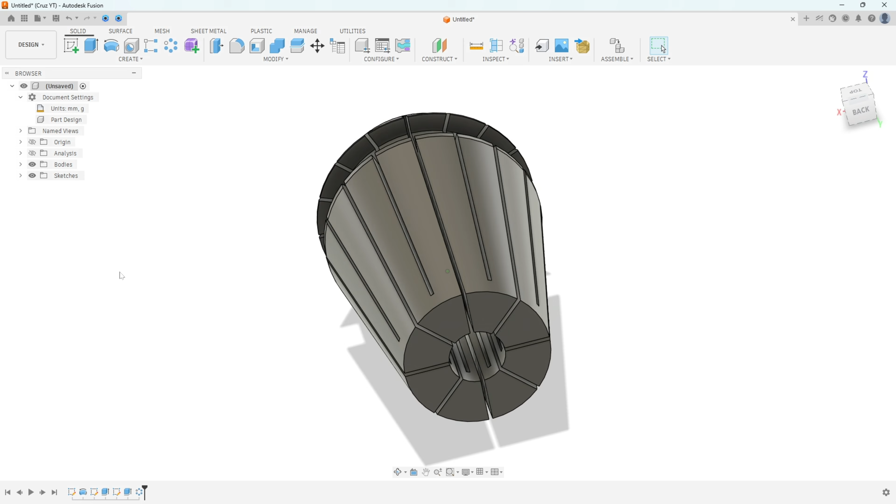Let's create one more tutorial in Autodesk Fusion. In this tutorial, you'll learn to create this collet chuck. And to create this, we'll learn to use Revolve, Thin Extrude, and Circular Pattern. So open Fusion and let's go.

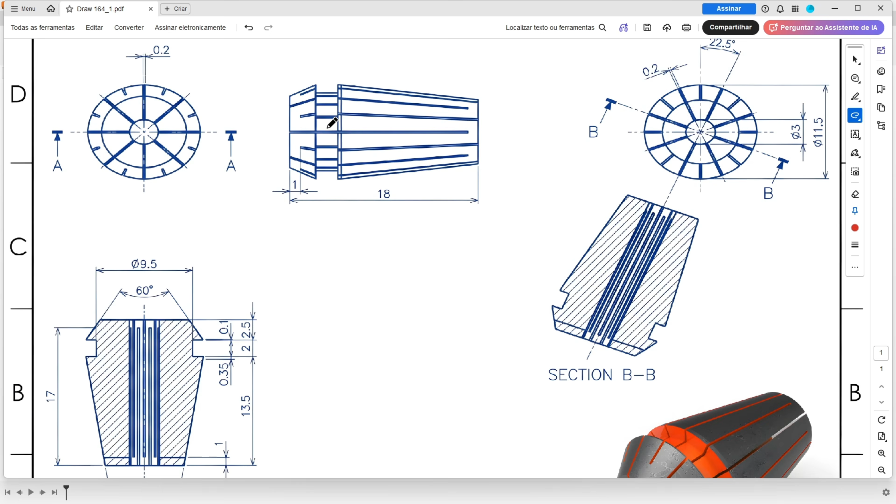The first step to create this collet chuck, we will select the right plane and make this sketch. We have the dimensions here. And here will be the midpoint. And the first thing that we'll make, we will create a center line with 18 millimeters of length. And we will create a line for this hole here.

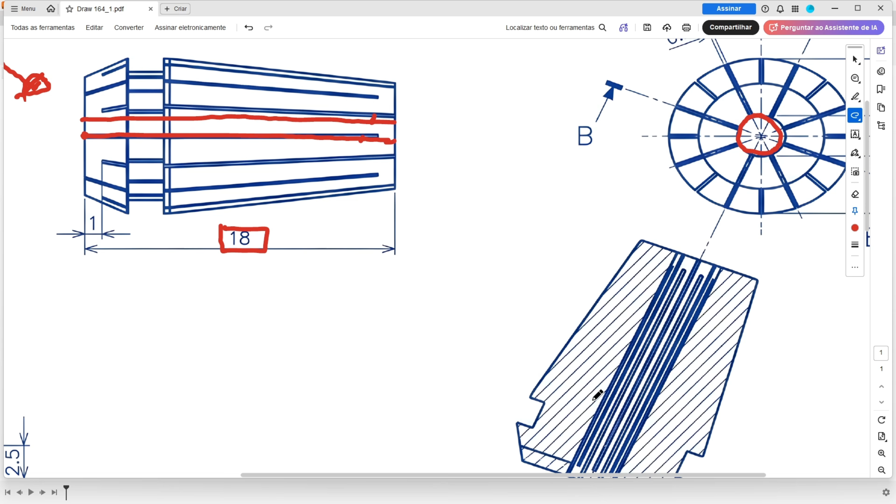So we will create a line here because we use the Revolve to create this part, okay? And the distance between this line here and this one will be the radius of this hole. And the radius is 3/2, 1.5 millimeters.

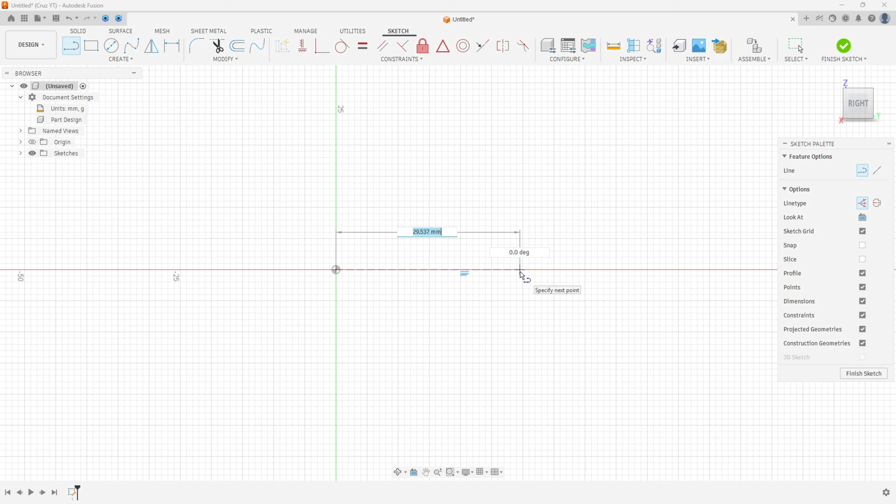So let's create this. Open Fusion, go to create a sketch, select the right plane, select a line, construction geometry, make a line here with 18 millimeters of length. And select line again, but remove the construction geometry, make a line here, and go to constraint, select equal, select this line and this one, and go to sketch dimension.

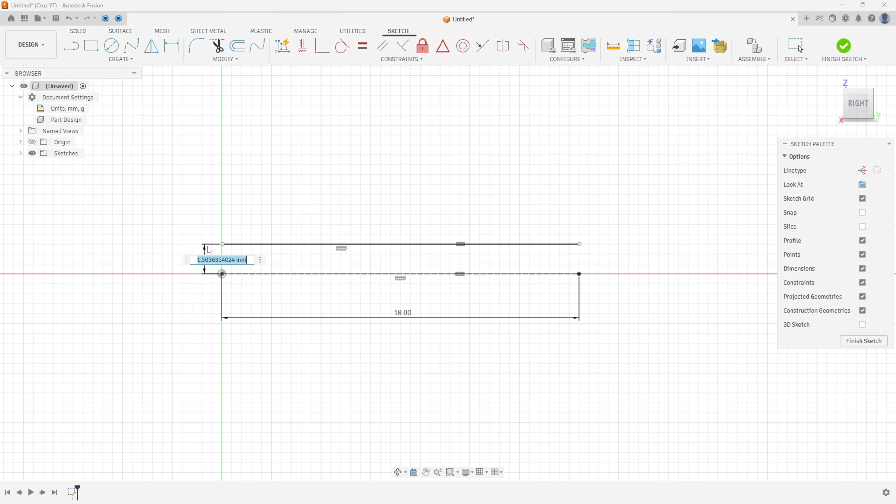The distance between these two lines is 1.5 millimeters. And here go to constraints, horizontal/vertical, select this point and the midpoint. We made this one here. And now we will go to this sketch here.

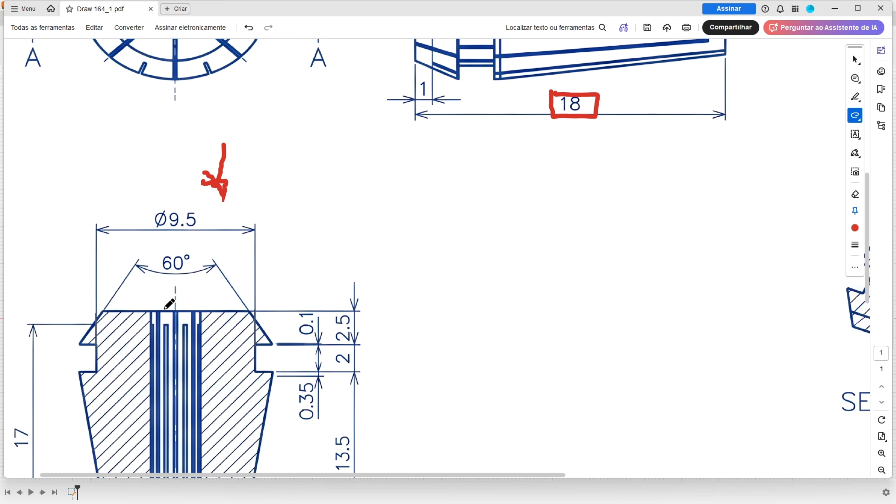And the first thing that we'll make here, we will create this line here, and look that we have a dimension here for a vertical line, and we will create a line here. This line here has 0.1 millimeters of length. The distance between this point here and this one will be 2.5 millimeters.

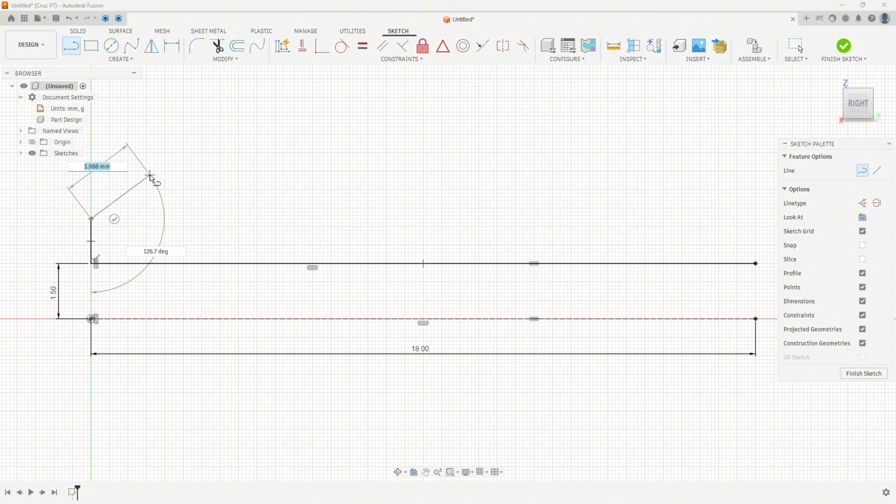So let's create this. Go to line, click here on this point, make a line here, another line here, and another one here. And go to sketch dimension. The distance between this point here and this line is 2.5 millimeters. And this line here has 0.1 millimeters.

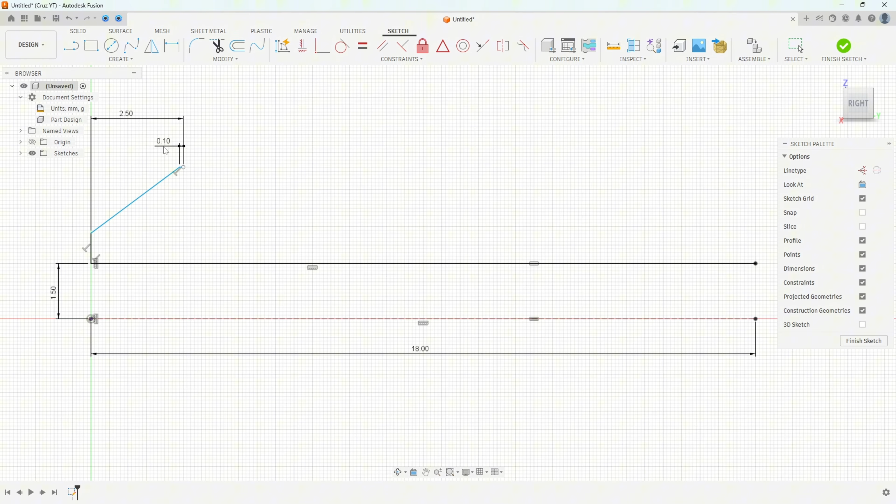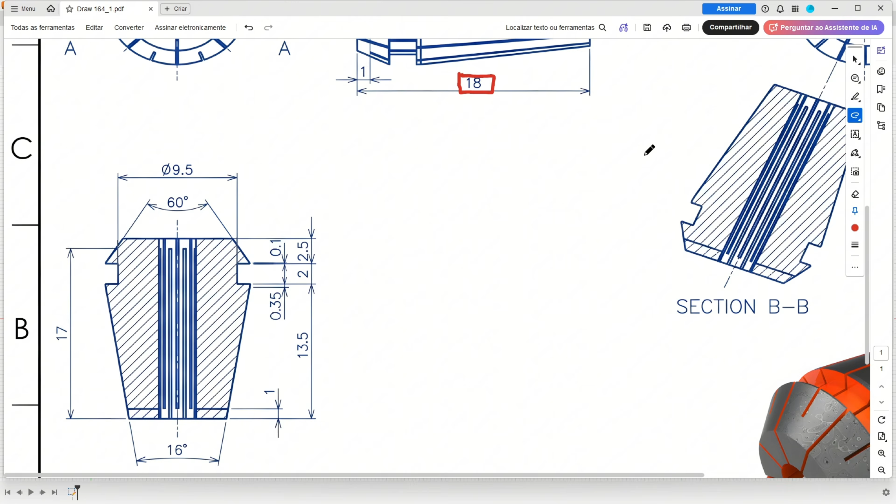And the angle between this line here and the center line is 60/2. It is 30 degrees. And the distance between this line here and the center line is the diameter of this chuck. The diameter 11.5/2 will be the radius here, okay? 11.5/2. So select this point and the center line here, 11.5/2, and press OK. Let me move the dimensions here a little bit.

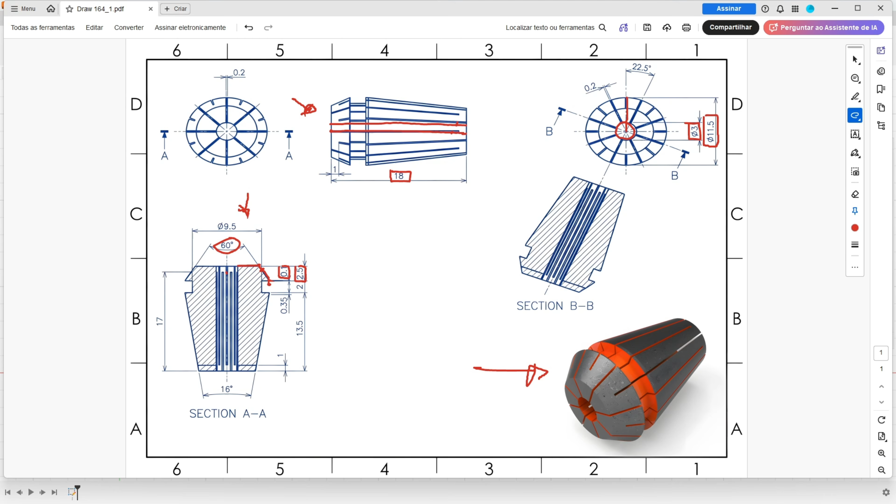We made this one. And now we will create these three lines here. And the length of this line is 2 millimeters. And the distance between this line here and the center line is 9.5/2. And this point here and this point have horizontal/vertical constraints.

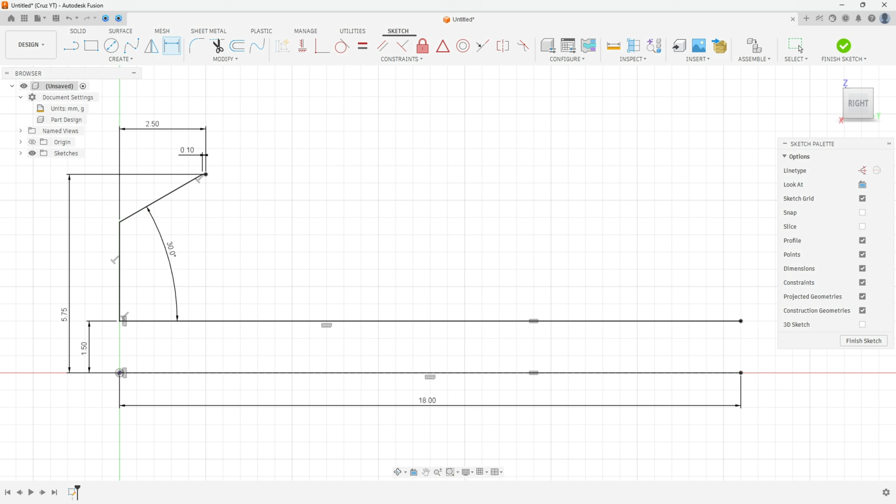So select line again, click here on this point, make this sketch here. Go to constraint, select horizontal/vertical, select this point, and go to sketch dimension. We have 2 millimeters here. And the distance between this line here and the center line is 9.5/2.

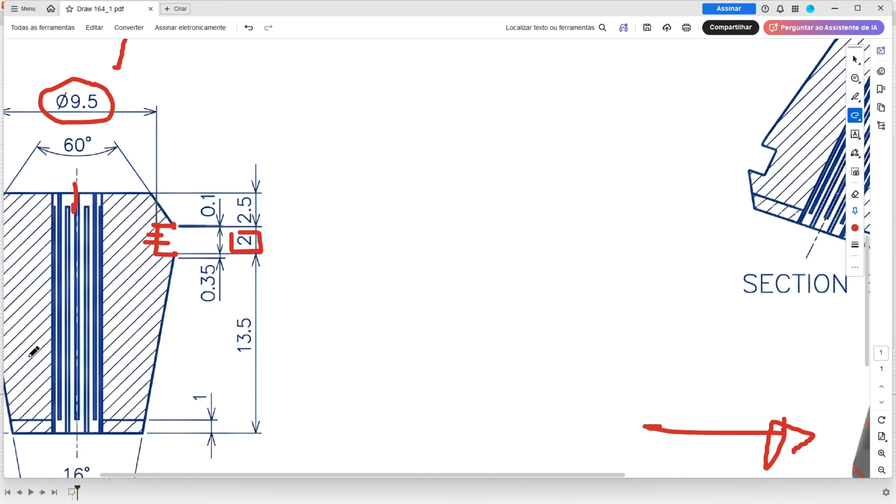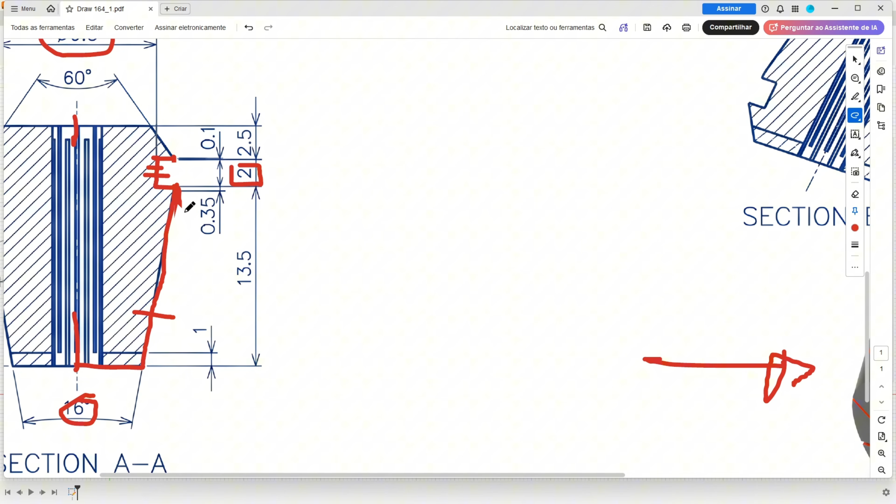And now we will create these two lines here. And here, the angle between this line and the center line is 8 degrees, 16/2. Select the line, click here on this point. But let me see something here. We have a vertical line here. So we have a line here with 0.35 and then these two lines, okay?

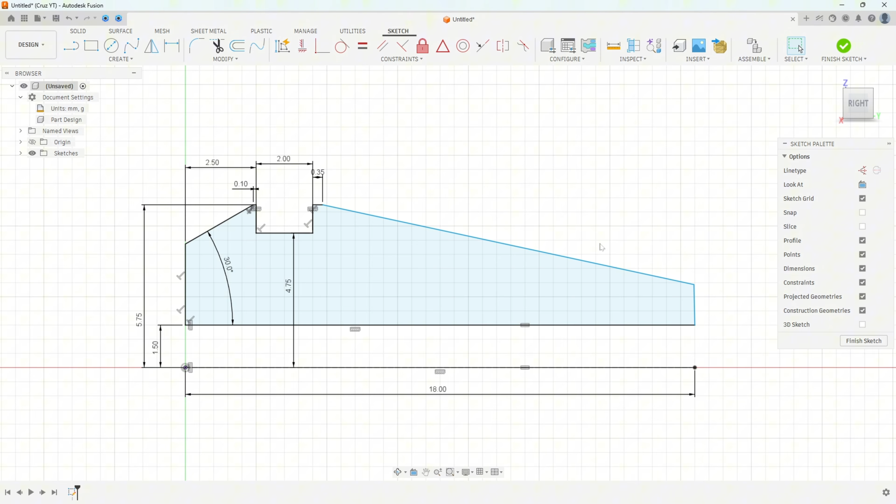So make a horizontal line here with 0.35 and now create these two lines here. Make sure that this line is a vertical line and the angle here is 8 degrees.

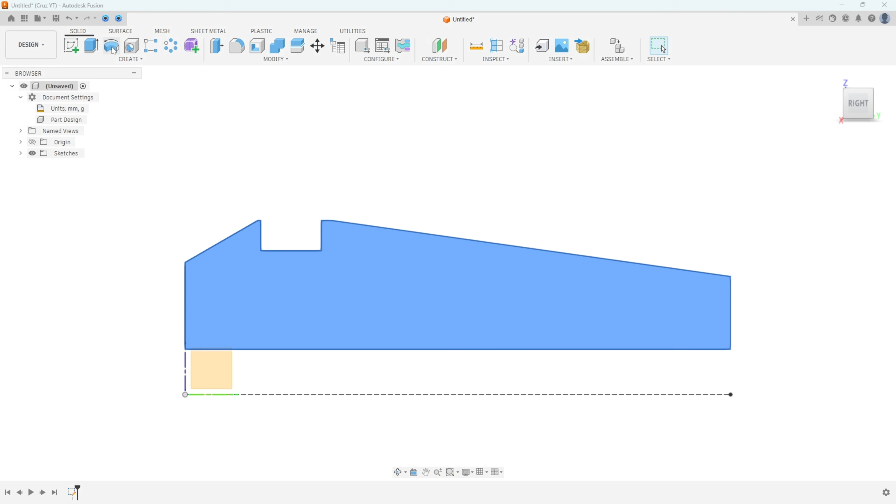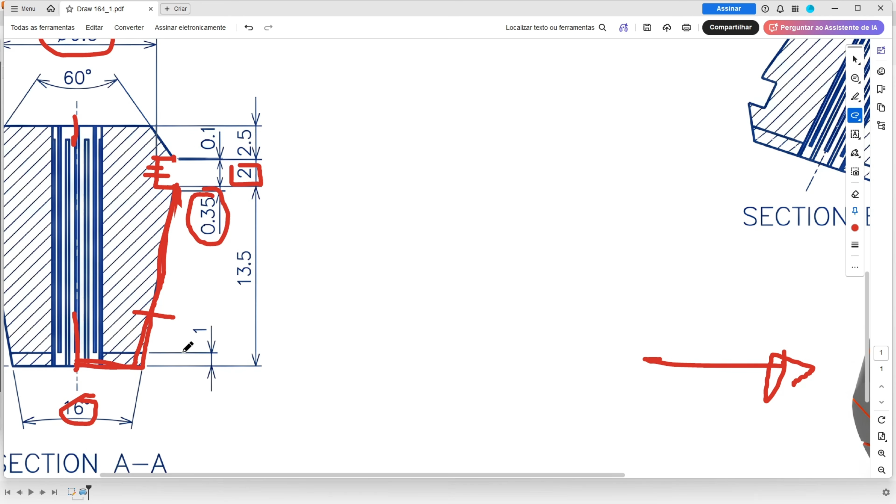We made this sketch and now finish the sketch and go to Revolve features. The axis, select this construction line. Operation here is new body and the angle 360 degrees and press OK. We made this one. Okay. And now we will create this cut here and this face.

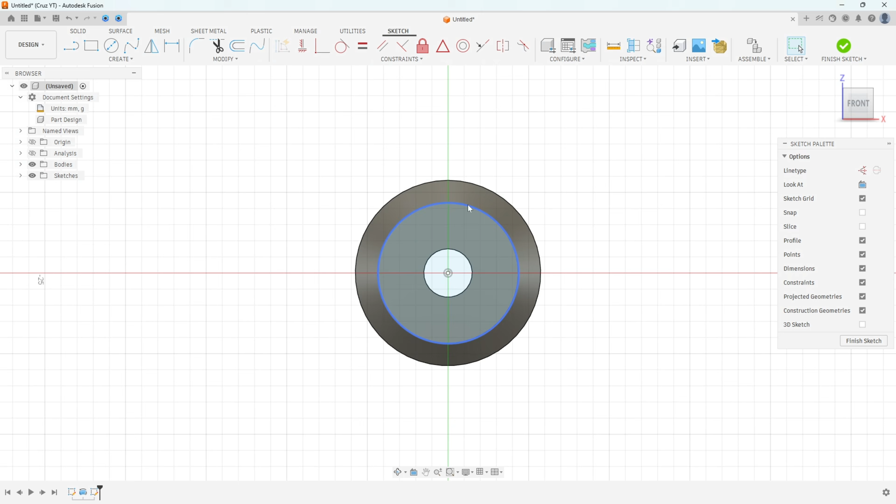So to create this cut, we will select this face here to create a sketch and we'll make a line here. Look that the angle between this line and this center line is 22.5 degrees. So let's create this. Go to create a sketch, select this face, select a line. Let's create a center line here with 10 millimeters.

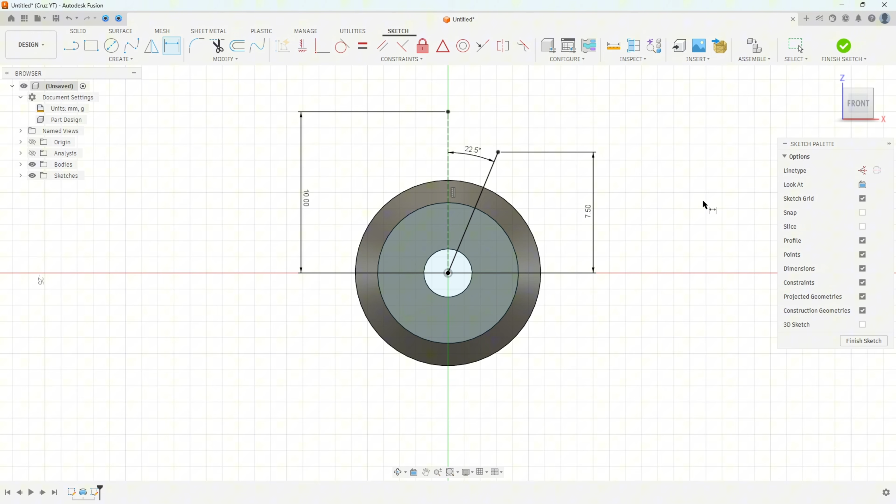And create another line here, but remove the construction geometry. And go to sketch dimension. The angle here is 22.5 degrees. And the distance between this point and the midpoint, let's use 7.5 millimeters. And now finish the sketch.

We need to cut this and the thickness of this cut is 0.2 millimeters. And we need to cut this 17 millimeters. We will create a cut on this side with 17 millimeters in this direction, from this face to this side here. And then we will create the same cut but on this face to this side with 17 millimeters of length.

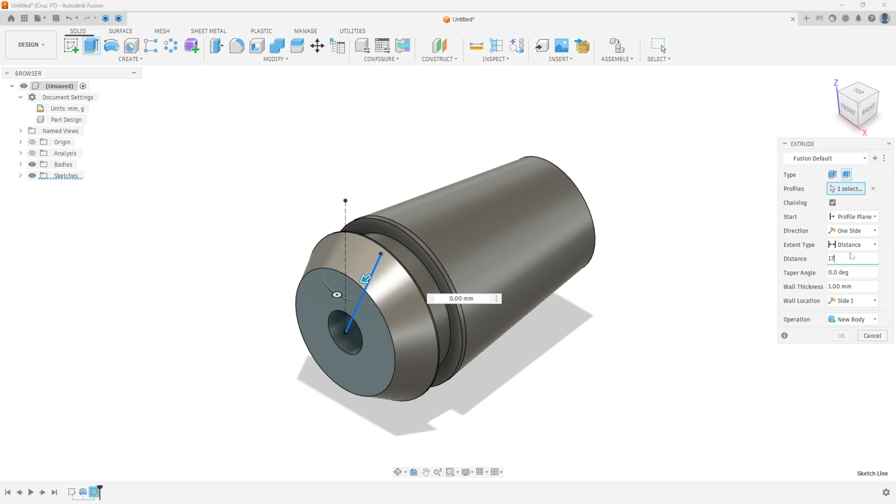So here go to Extrude and for the type here select thin extrude, select this line, and the start profile plane, the direction one side, the distance here 17 millimeters, but we use minus 17 millimeters. Taper angle 0, wall thickness is 0.2 millimeters. And the wall location, select the center.

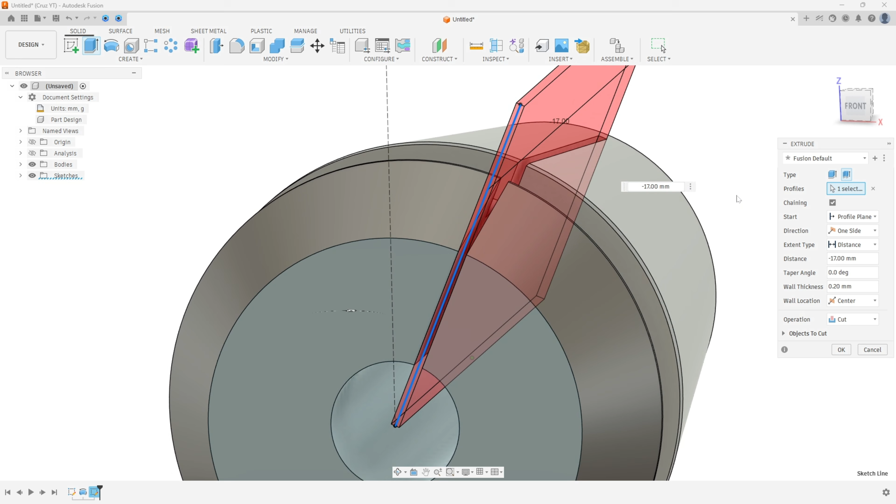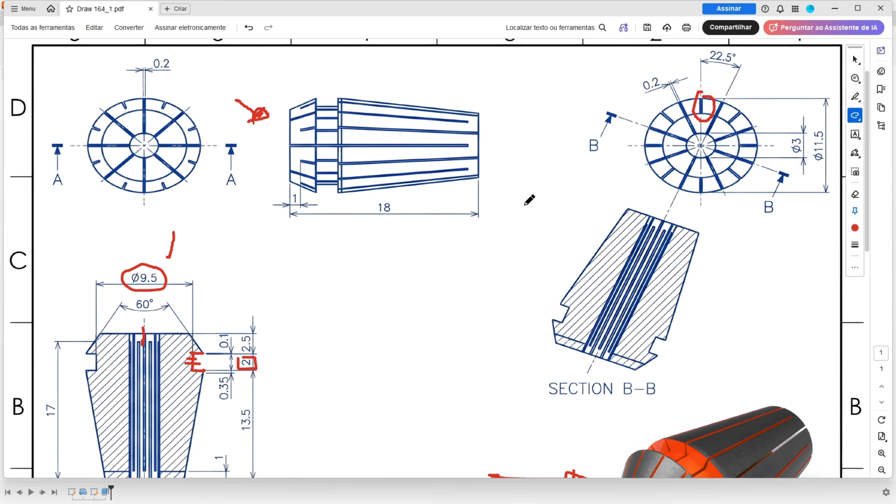We will make this cut here, operation cut, and press OK. We made this one. And now we will create the same but on this side and it will be in the center here. So let's create this. Go to create a sketch, rotate this and select this face. And select a line, make a line here with 7.5 millimeters.

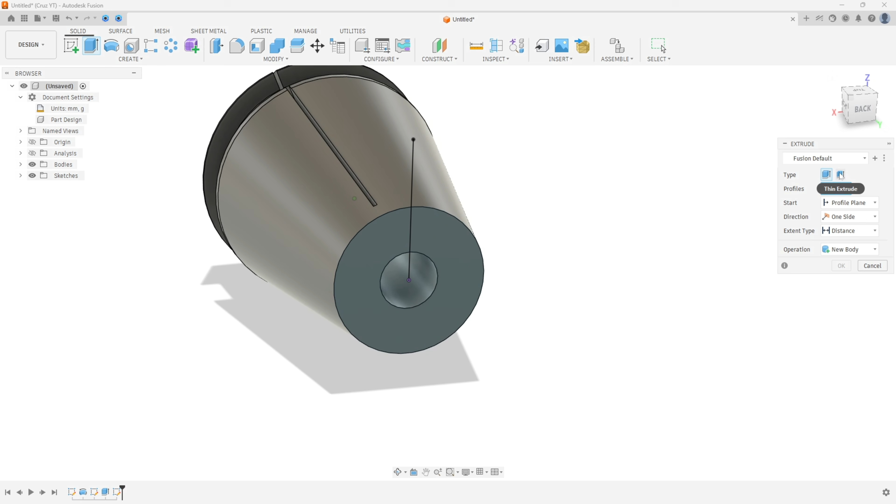And finish the sketch. Go to Extrude, Thin Extrude, select this profile. And the direction one side, the distance here minus 17 millimeters. The wall thickness 0.2 millimeters. And the wall location, select the center, operation cut, and press OK.

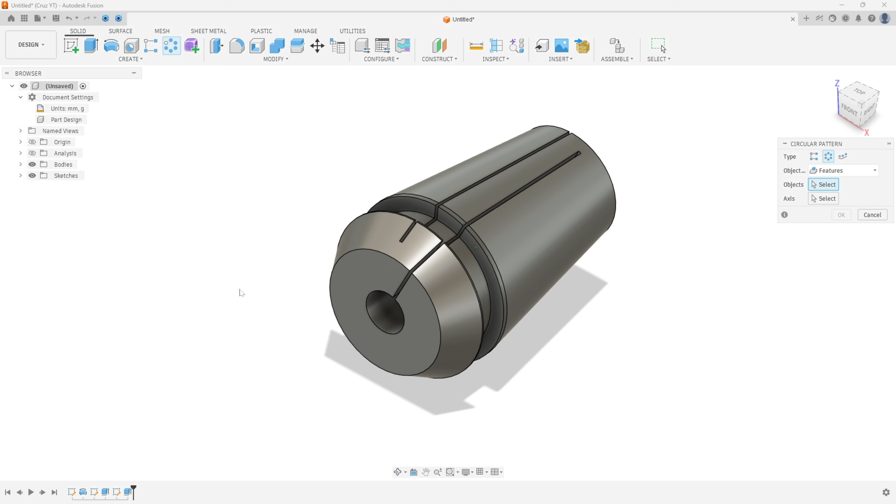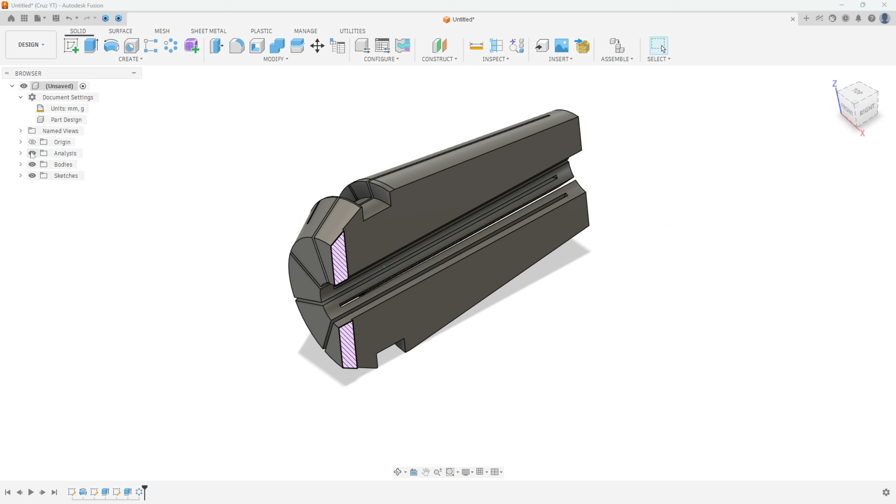And now we need to create 8 cuts here. So to create this, go to circular pattern, for the object select features, select the last 2 extrudes. The axis here, select the center axis, or you can select this face. The quantity here is 8. Distribution full and press OK. We made this one. So that's it. Here we finish our exercise.